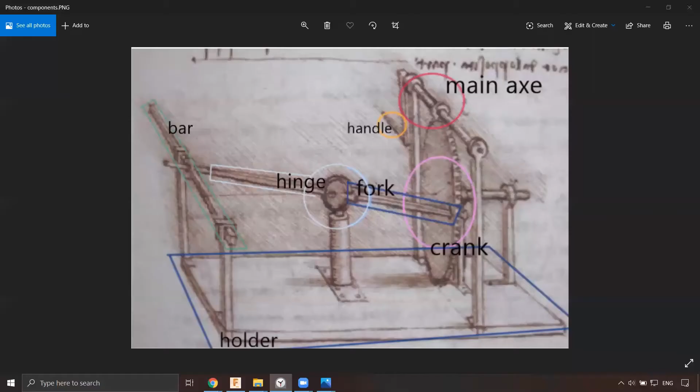Hello! In this video, we'll start to design the components into the Fusion.

First, let's talk a little bit and understand what are the components of our mechanism. So, how does this mechanism work?

The main axe will be rotated using the handle, and by the rotation, it will activate the crank. The crank will rotate as well, and will move around the fork, which will activate the hinge, and the hinge being activated will move the bar to the left and to the right.

So what we need to have is a holder, which will have a base and 1, 2, 3, 4, 5, 6, 7 pylons. We will have the main axe, which will have a part that we'll discuss in the next videos.

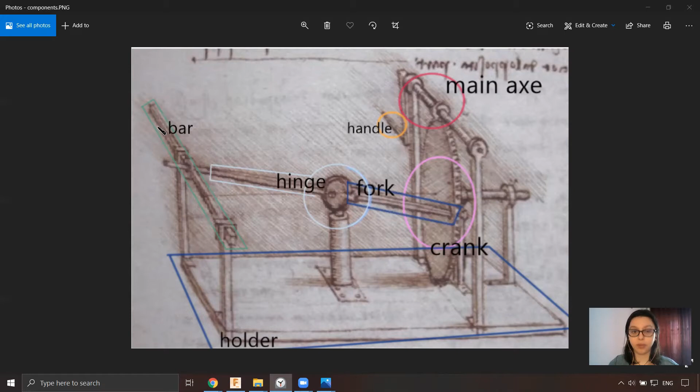We'll have again the handle that will power the main axe, the crank, the fork that will be inserted into the crank and connected to the hinge, that will help the bar moving to the left and to the right, and also the bar. So those are our components.

So let's go to Fusion and make the components.

So what I want to do is to activate the root component. I will hide the sketches, I will hide everything, and I will go to Assemble, New Component, and let's start with the crank.

I will go again to the root component, Assemble, and I will have main axe. I will go to the root component again, and I will create a new component. And this will be, let's say, the bar.

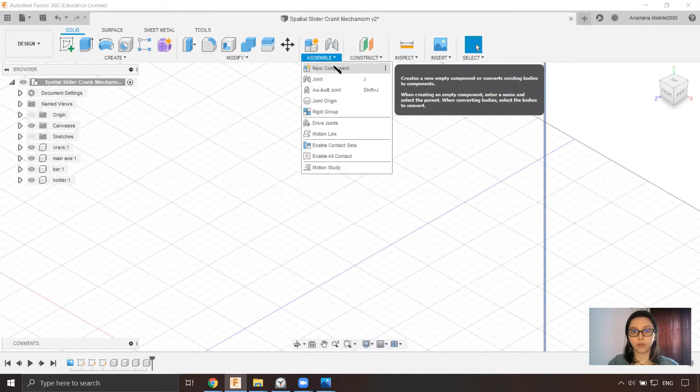Let's don't forget about the holder, because this one is the first one that we will design. Handle. Let's add the hinge as well. And the fork.

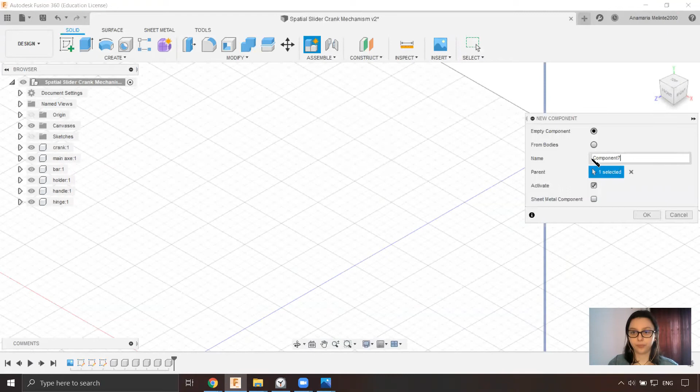Let's see if everything is in place. So we can see the main axe here, the handle, the hinge, the fork, the crank, the bar, and the holder. So right now we have all the components.

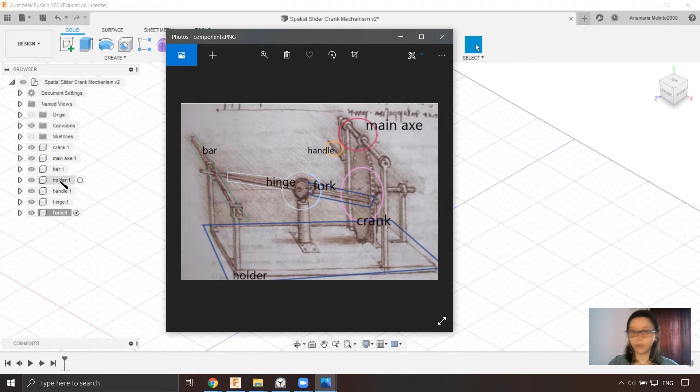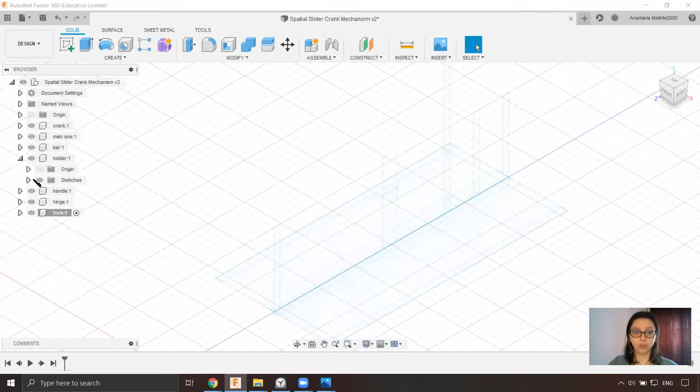So we can start designing the holder. For this, I'm gonna get the sketches into the holder component. I will delete this one because I don't need it, and I will delete the canvas as well because I don't need it. I'm having those sketches with the dimensions and I can work with them.

And I will activate the holder component. What I will do is now I will start extruding. So let's do this. I want to extrude this side first.

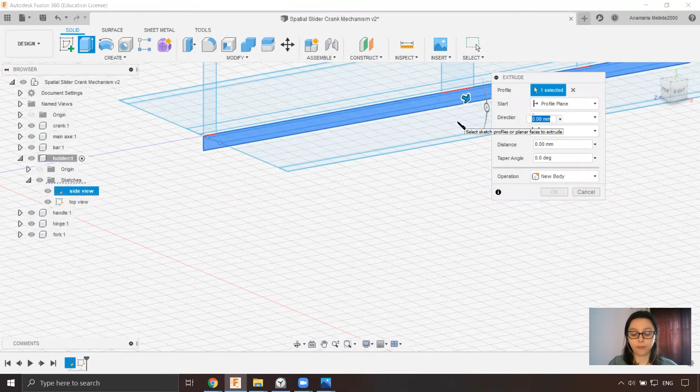It will have 80 divided by 2 in one side, but we will do symmetric. So we have the base. Let's see if it has the right dimensions, 80 millimeters and 160 millimeters. Awesome, so we started the base.

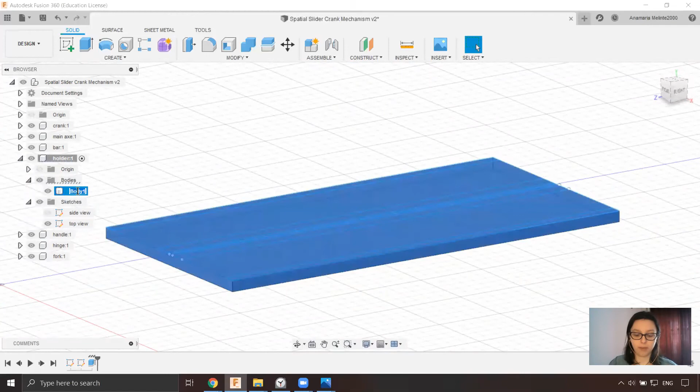Let's call it base. And what I need to do now to continue the holder is to use the side view, but first I want to edit it a little bit.

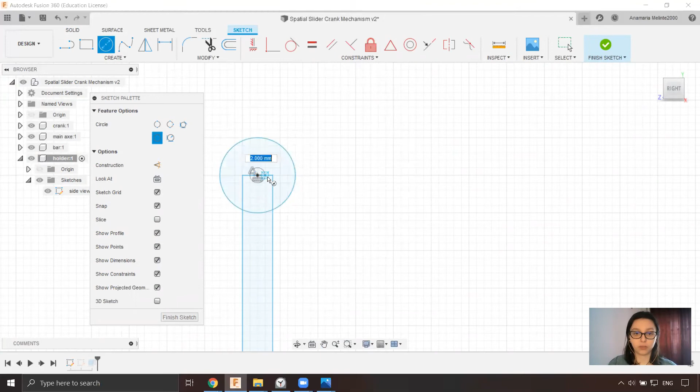I'll go to Edit Sketch, and I will go to the middle of those, and I will put some circles. And 5. Okay, so the bar will go through this circle. And this will be the pole.

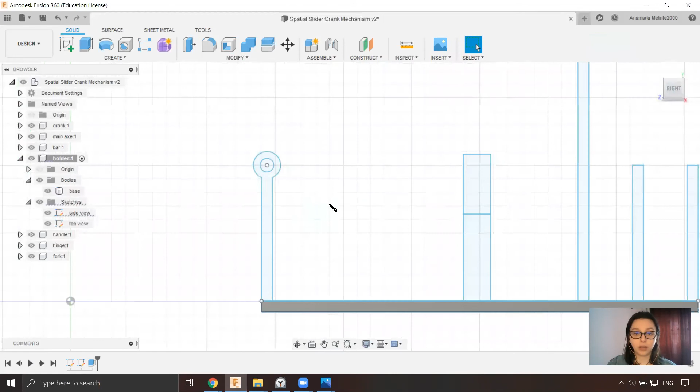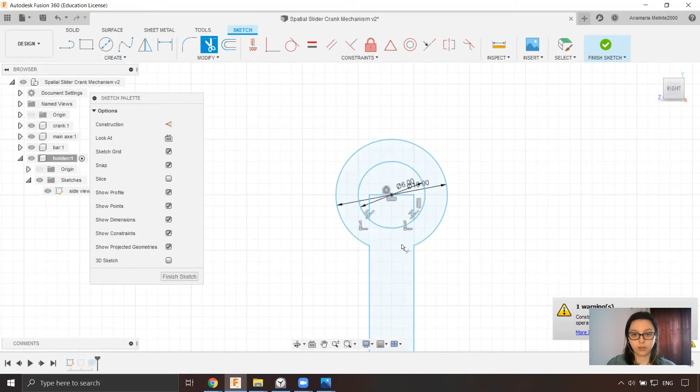Finished sketch. And I will do the same thing. I will just edit the side view, edit, and I will do the same thing. 10, 6, and I will trim the lines that I don't need. I will finish the sketch.

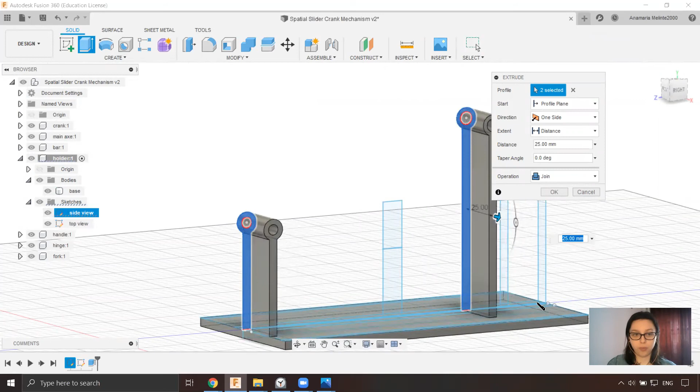Okay, and now what I can do is I can extrude them, and to be more precise, I can click on the side. Okay, so as you can see, 40 millimeters. I need two sides, so I will have only 40,

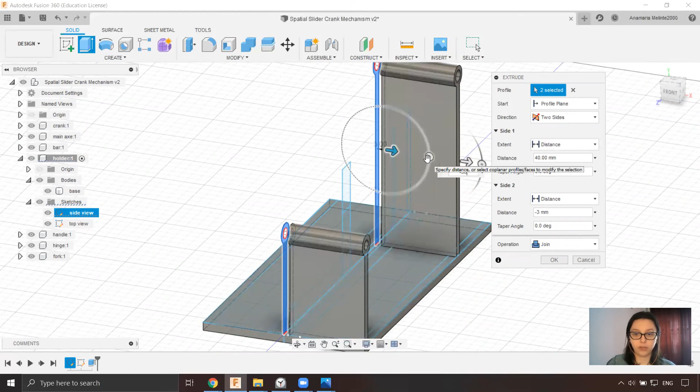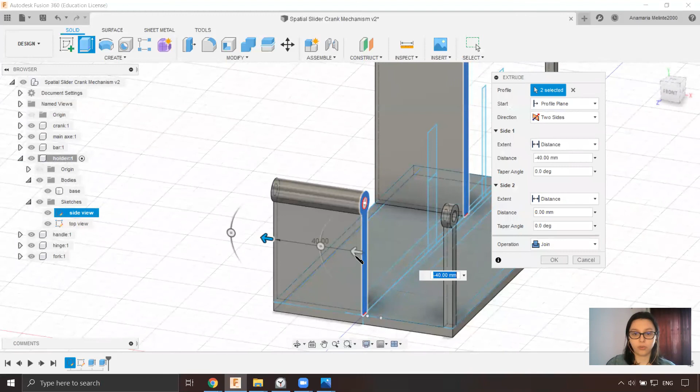and the other side will be minus 36. So in this way, I will have, as you can see, I'm following this line, and I will do the same thing in the other direction as well. Extrusion, I'll go to the other direction, two sides, there we go, 36.

I will hide a little bit the sketches, and as you can see, there we have a starting for the holder. Into the next video, we will continue the holder using the sketches.